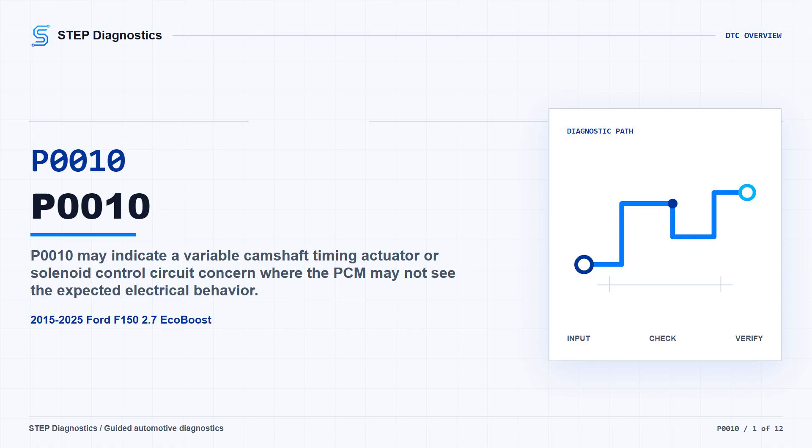Broadly, this can involve the VCT solenoid circuit, power feed, PCM control wiring, connector condition, oil pressure or cam timing related concerns, VCT alignment, the phaser, or radio frequency interference. For this episode, we're staying on the P0010 electrical diagnostic path.

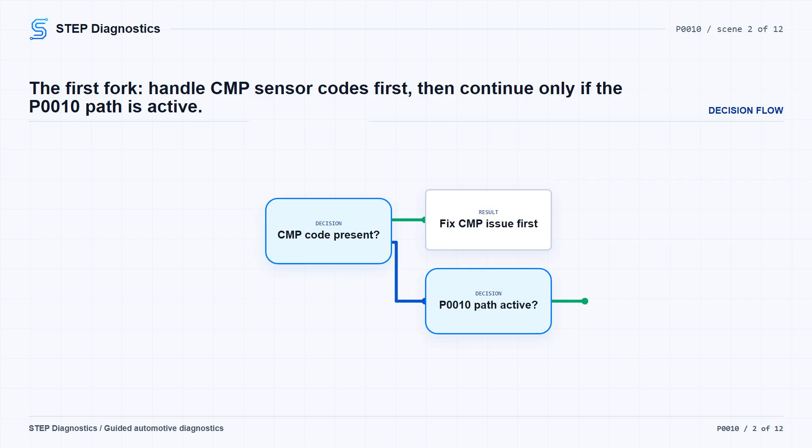Start with the basic system checks and pull the VCT related codes with the ignition on. If any camshaft position sensor codes are present, handle those first before chasing P0010. If the P0010 path is active, continue into the VCT circuit checks. If no codes are present, but the symptom is still there, move into the symptom-based path instead of forcing this circuit test.

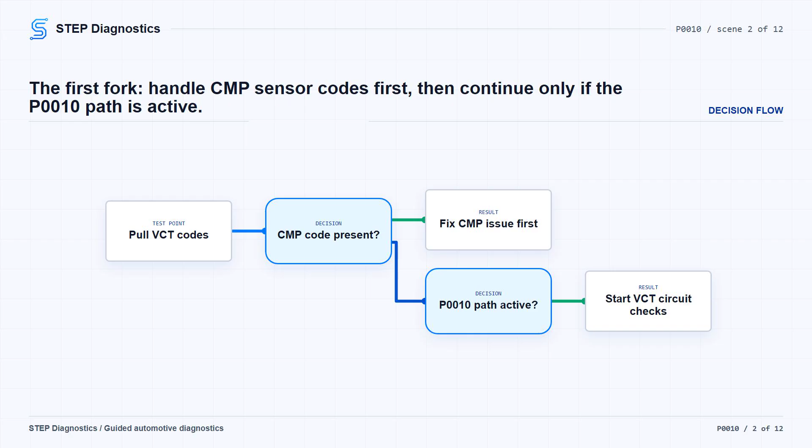Before running the self-test, make sure the engine is at operating temperature. Then check whether P0010:00 or P0010:17 is present. If it is present, go straight to the solenoid resistance test.

If it is not present, do a thorough wiggle test on the VCT harness and recheck. If the code shows up during that harness movement, continue with the circuit testing. If it does not, pause this path and move into the intermittent or no-code diagnostic direction rather than guessing at parts.

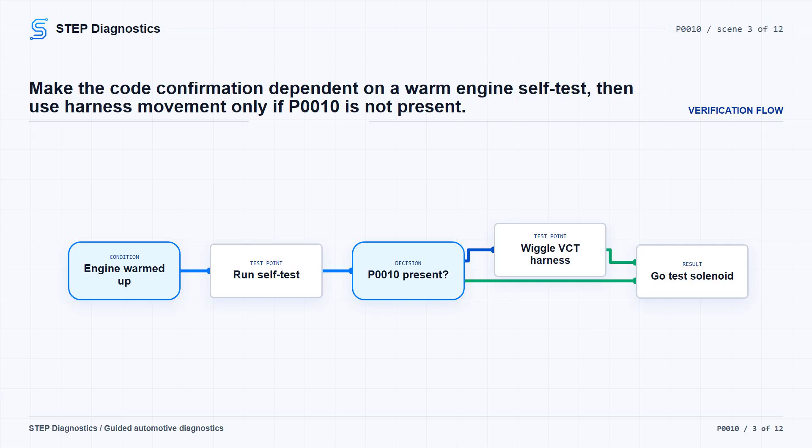With the ignition off, disconnect the VCT solenoid tied to the current P0010 fault path. Work on the suspect VCT solenoid indicated by the DTC. On this 2.7 EcoBoost procedure, the listed component side connector pin pairs are C1542 pin 2 to C1542 pin 1,

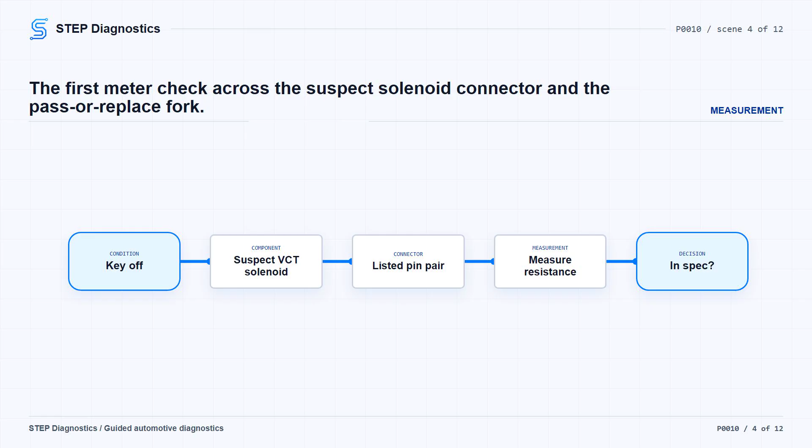C1369 pin 2 to C1369 pin 1, C1370 pin 2 to C1370 pin 1, and C1625 pin 2 to C1625 pin 1. Measure the solenoid resistance.

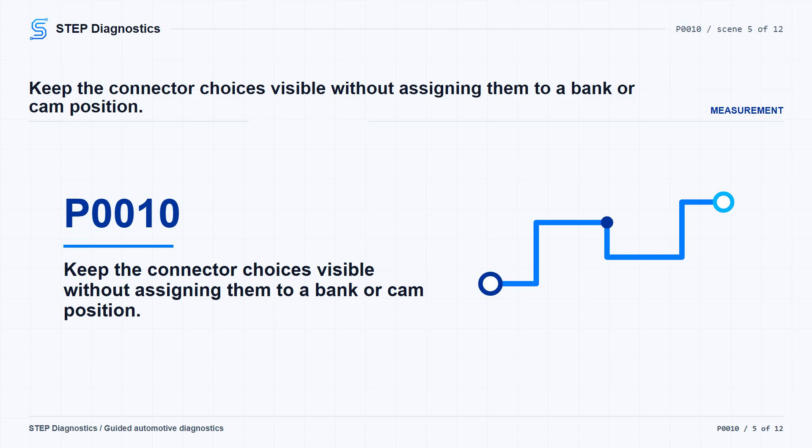If it is between 5 ohms and 14 ohms, continue to the internal short check. If it is not between 5 ohms and 14 ohms, install a new variable camshaft timing solenoid. Clear the PCM DTCs and repeat the self-test.

Next, check the suspect VCT solenoid for an internal short. The listed component side connector pins for this engine are C1542 pin 2, C1369 pin 2, C1370 pin 2, and C1625 pin 2. If the resistance is greater than 10,000 ohms, move on to the VPWR feed check.

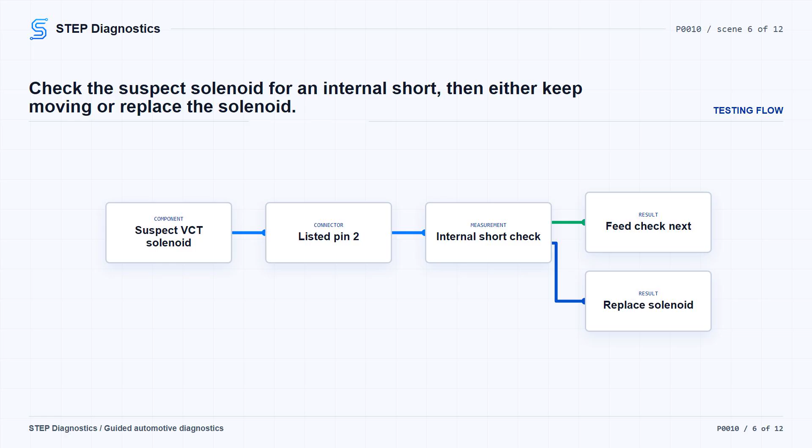If the resistance is not greater than 10,000 ohms, install a new variable camshaft timing solenoid. Clear the PCM DTCs and repeat the self-test. Use the exact connector and meter reference for the suspect solenoid you have identified. If that identification or reference point is not clear, pause, recheck the earlier diagnostic path, and avoid guessing.

Now check the VPWR circuit for an open. Turn the ignition on and measure voltage at the applicable connector pin for the suspect VCT solenoid: C1542 pin 1, C1369 pin 1, C1370 pin 1, or C1625 pin 1.

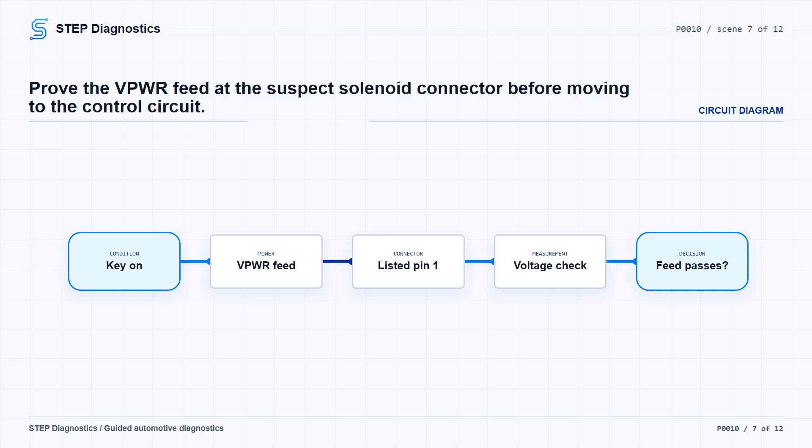If the voltage is greater than 10.5 volts, the feed side has passed this check and you move to the control circuit open test. If it is not greater than 10.5 volts, repair the open circuit, clear the PCM DTCs, and repeat the self-test. With the ignition off, disconnect the PCM connector and check the VCT control circuit for an open.

The listed connector to PCM pin pairs are C1542 pin 2 to C1232E pin 37, C1369 pin 2 to C1232E pin 81, C1370 pin 2 to C1232E pin 99, and C1625 pin 2 to C1232E pin 36. If the resistance is less than 5 ohms, continue to the short to ground check.

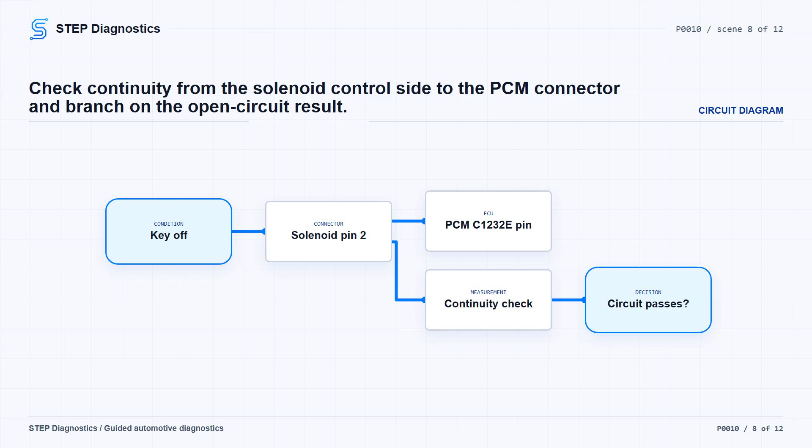If it is not less than 5 ohms, repair the open circuit, clear the PCM DTCs, and repeat the self-test. Next, check the VCT control circuit for a short to ground at the suspect solenoid circuit.

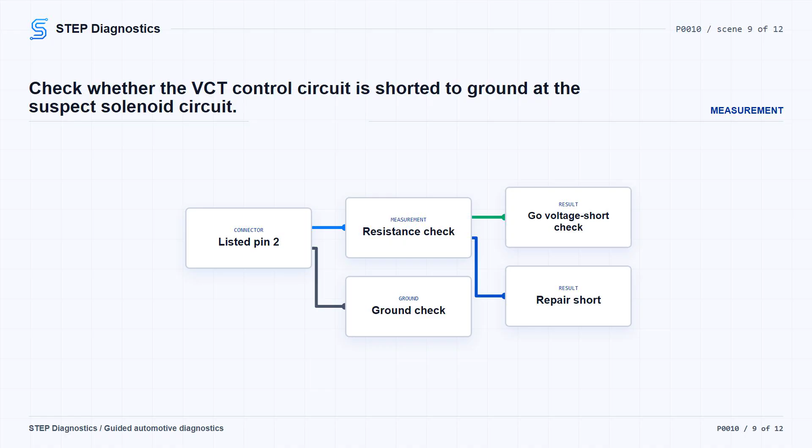The listed connector pins are C1542 pin 2, C1369 pin 2, C1370 pin 2, and C1625 pin 2. If the resistance is greater than 10,000 ohms, move on to the short to voltage check. If it is not greater than 10,000 ohms, repair the short circuit, clear the PCM DTCs, and repeat the self-test.

Then check the VCT circuit for a short to voltage. Start with the ignition off. Then turn the ignition on for the voltage check at the applicable connector pin: C1542 pin 2, C1369 pin 2, C1370 pin 2, or C1625 pin 2.

If any voltage is present, repair the short circuit, clear the PCM DTCs, and repeat the self-test. If no voltage is present, continue to the PCM connector inspection and operation check.

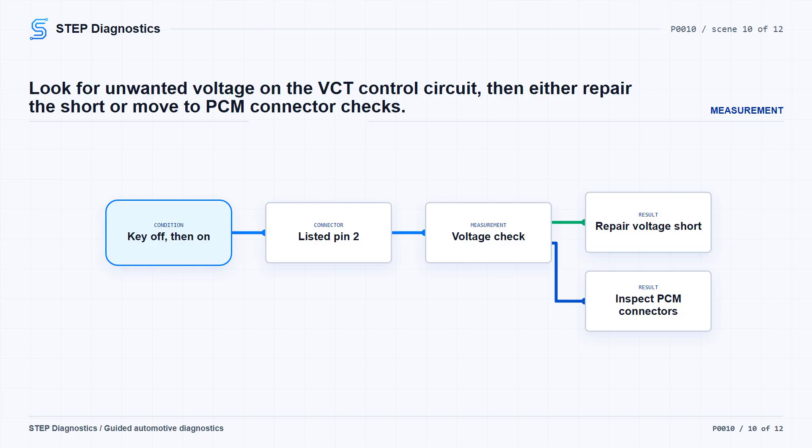At this point, check for correct PCM operation. Disconnect all PCM connectors and inspect for pushed-out pins and corrosion. Reconnect all PCM connectors and make sure they seat correctly. Then verify whether the concern is still present.

If it is still present after that connector inspection and reseating, install a new powertrain control module and complete the required RVC generation. If the concern is gone, the system is operating correctly at this time, and the issue may have been caused by a loose or corroded connector.

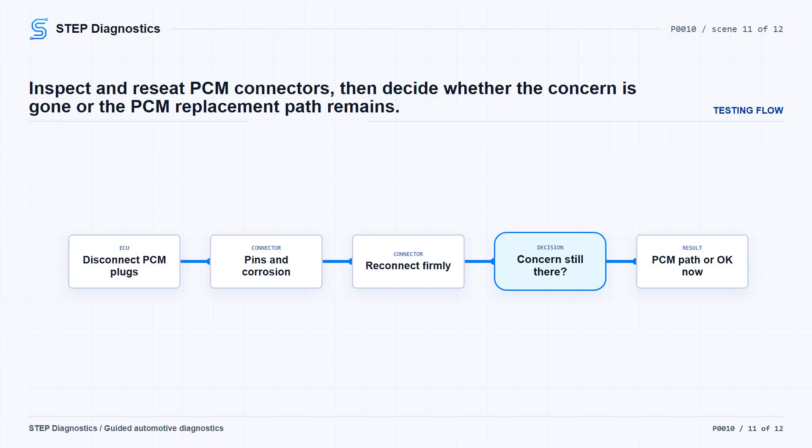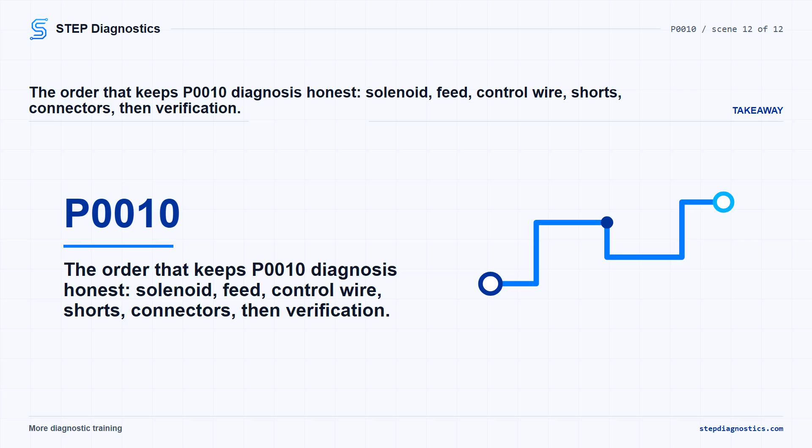The key on P0010 is to prove the solenoid first, then prove the feed, the control circuit, shorts, and connector integrity before condemning a module. Keep verification separate from testing. Clear the PCM DTCs. Repeat the self-test after a repair and confirm the code stays gone.